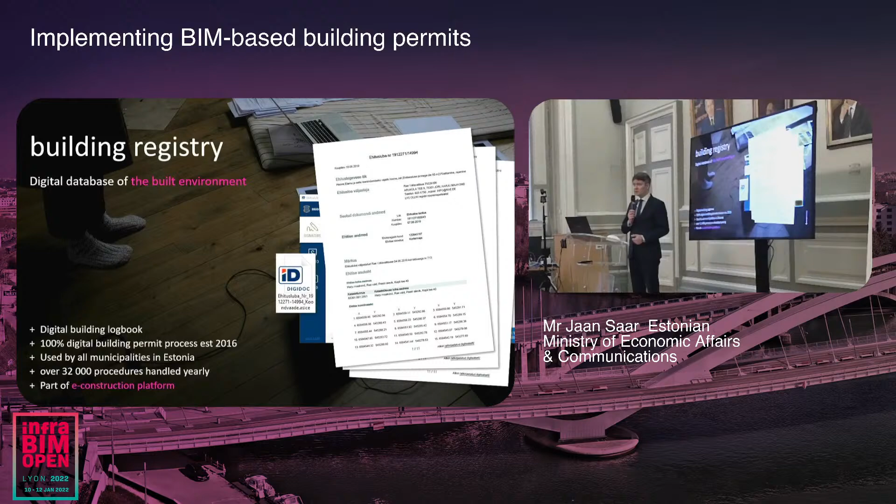So once everything is uploaded to the system, it is reviewed by the local authorities, by different agencies, anybody that is related to the building process, and when everybody signs off, you get a building permit like that. The system we have, the building registry service, is used by all municipalities in Estonia, so it is central. Mostly for buildings, also for infrastructure, but some constructions for roads are also handled by the transport administration. But we are working to bring them all together on one platform.

And the building registry services are also part of the e-construction platform, which is kind of an umbrella system that we have developed to collect all services and data related to the built environment into one place. So it's just one click away, and you don't have to search in different systems. Okay, so that's a bit of a background.

But what we are doing now is we are moving forward from just this digital PDF drawing paper-based process into something more advanced. And before I jump into the BIM-based building permits, I wanted to talk a little bit about killer apps. I'm not sure how many of you are familiar with this term.

I hope many of you are. A killer app means a killer application. It is something that you can do on a device or a service that really brings so much value that everybody wants to use it. And it means that it's so popular that it becomes a reason, for example, for buying a computer.

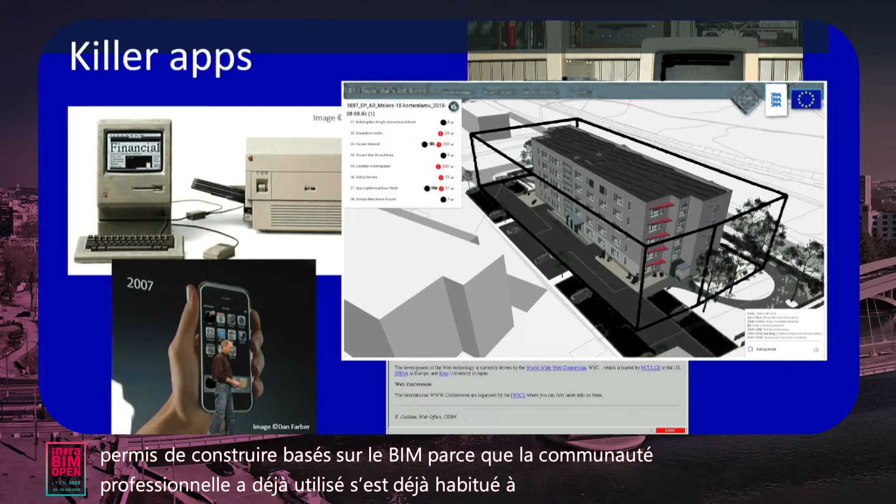And I strongly believe that the killer app for BIM is going to be BIM-based building permits. Because the professional community has already gotten used to using BIM - designers use it, engineers, construction guys. It's there, but a lot of people are still outside of this specialized field. For example, in Estonia as well, this includes local authorities, municipalities, people who review building permits. They don't usually come into close contact with BIM. And I think this is the case in most countries.

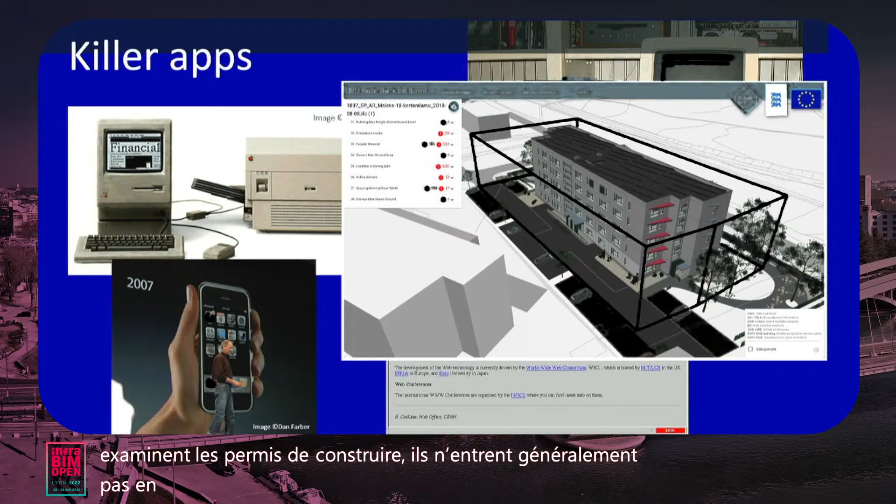But we have started developing a BIM-based building permit system. We've just finished the first phase. We will start piloting with Estonia's capital city, Tallinn, hopefully in March already, to see how it works in real life, how people in the municipality, in different offices, react to having a BIM model there.

And I have a short video here explaining how it works, how the process is done. This was developed with the help of the European funds, of course. We had a Dutch company working together with an Estonian IT company developing this.

And the process starts with the applicant. They have an application, a building permit they want to get. They have a model. Important to note here is, of course, the use of open standards, IFC model. They upload this IFC model to the building registry service, which is part of the e-construction platform, where it becomes available to do some checks on it.

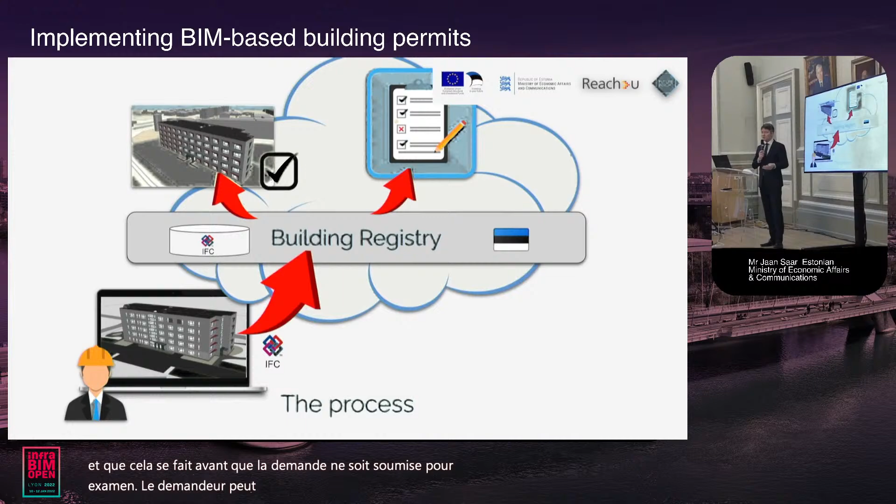And we are applying many automated checks to this model. This is done all before the application is submitted for review. The applicant can do this before they submit it. They can go over the checks, see if everything is okay, if the model is according to standards, etc.

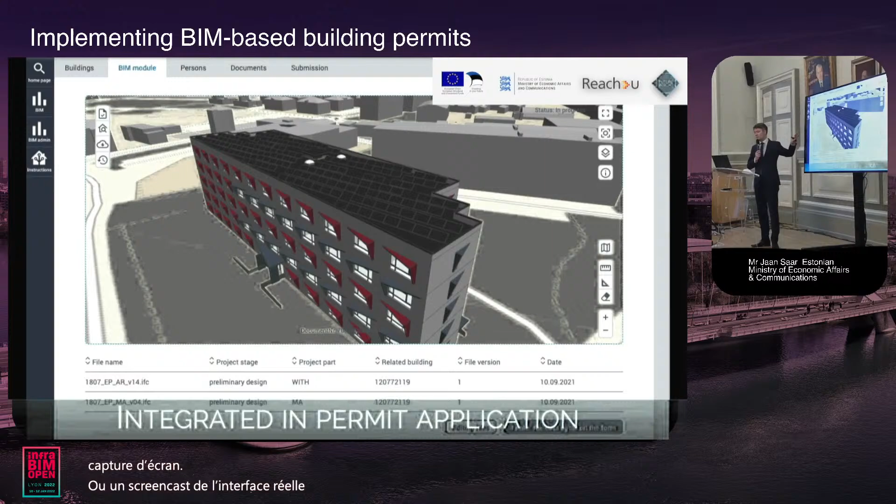And here's now a screenshot or a screencast of the actual interface. It is embedded into the e-construction platform together with the building permit services. And of course, there's a viewer for the BIM model.

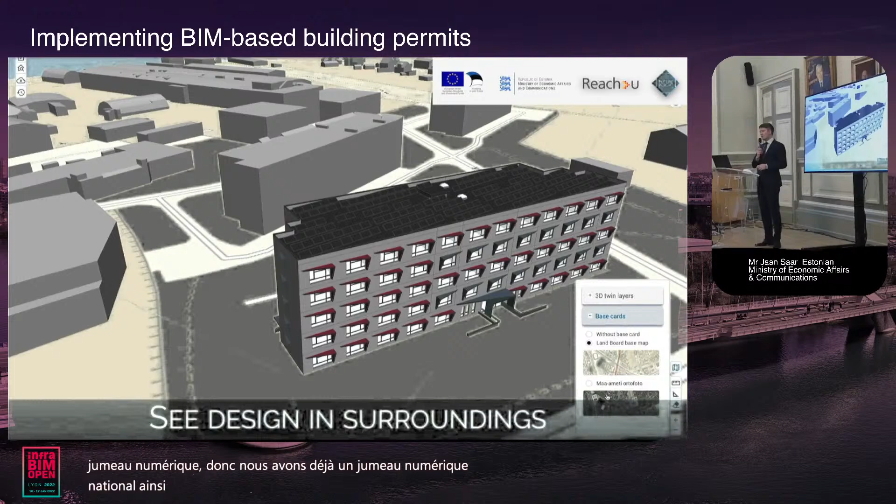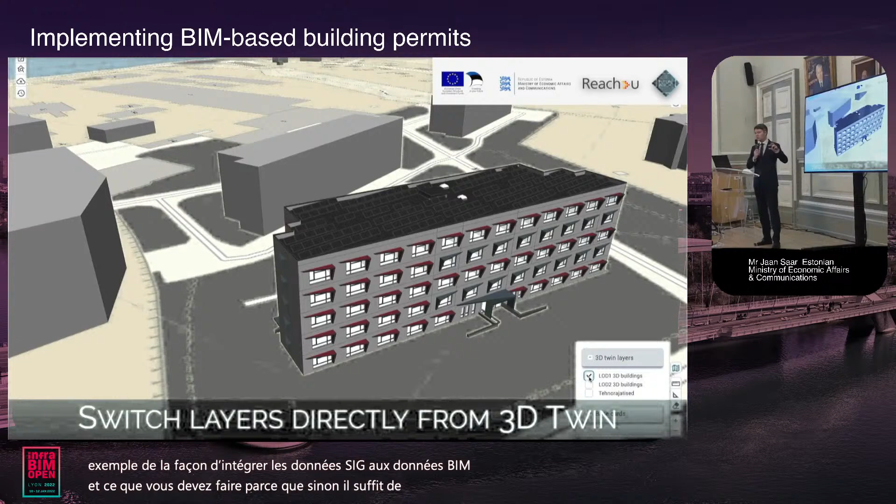And what you see around the central building is what we get from the digital twin. So we already have a national digital twin as well that we launched at the beginning of last year. And this is another really good example of how to integrate GIS data with BIM data and why you need to do that. Because otherwise, just looking at the building as a standalone without the surroundings, it doesn't make much sense. And for the municipalities, for the guys checking this, whether or not the building is suitable in that position, it's really important to have the surrounding buildings, surrounding roads, etc., all of that connected.

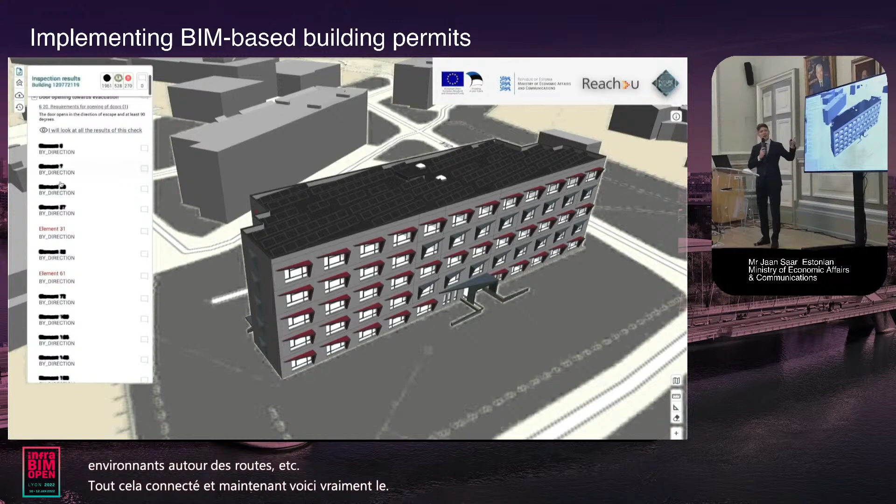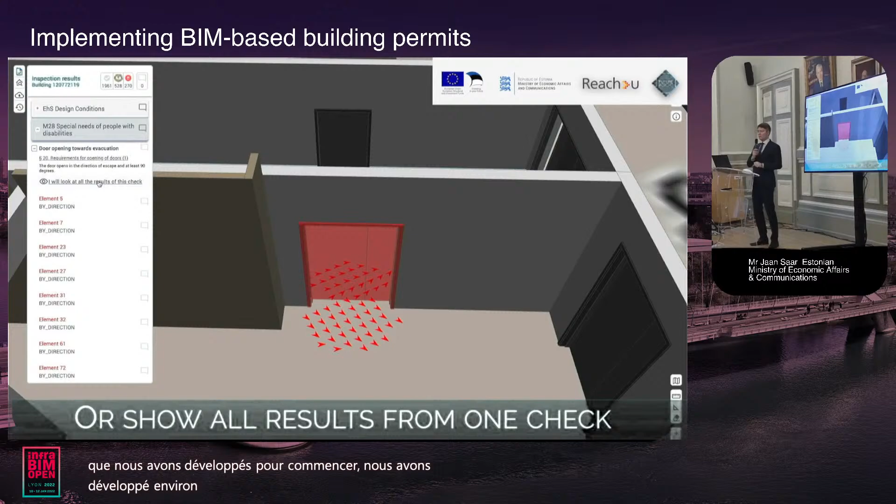And now here is really the killer app, which is the automated checks. So we've developed, for a start, about 50 or 60 different checks. But this is just a start. Because we are now going to pilot, we're going to test it very much in real life to see which kind of checks we need to really do and which are bringing the most value.

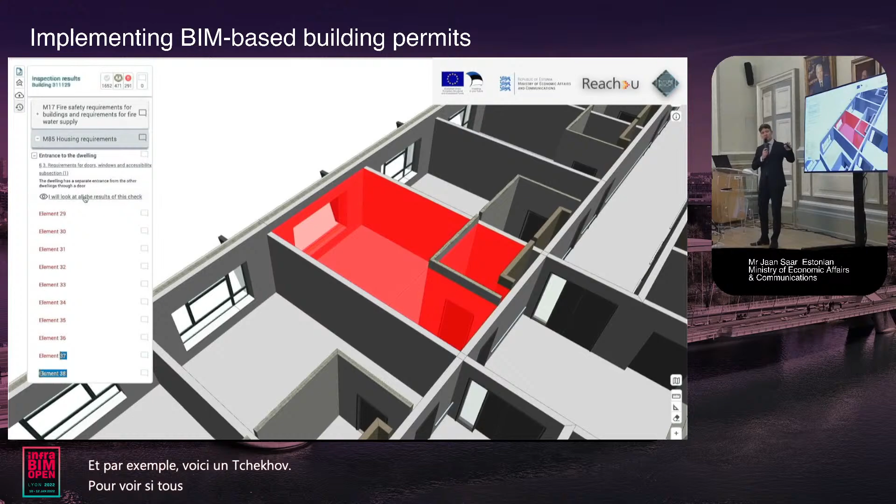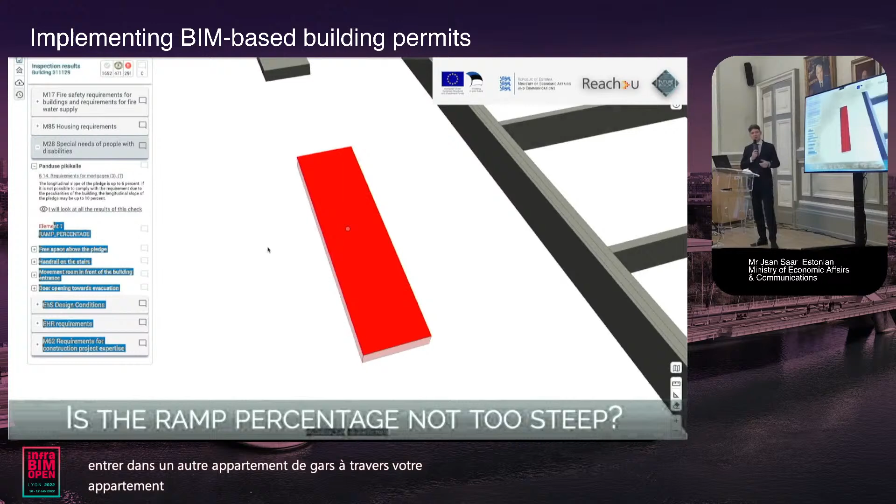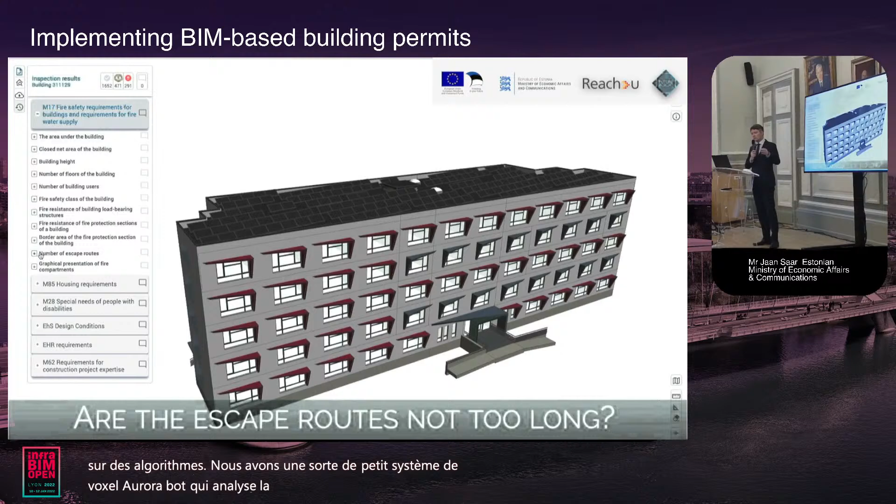For example, here is a check to see if all apartments have an entrance or exit to a public space, because you don't want to walk into another guy's apartment through your apartment. This can all be done automatically by using IFC zones and other IFC elements, but we also are applying more advanced checks here. We are also doing algorithm-based checks. We have kind of a little bot or a voxel system that analyzes geometry of the model and checks whether or not, for example, you can fall off somewhere, which you saw in the last example.

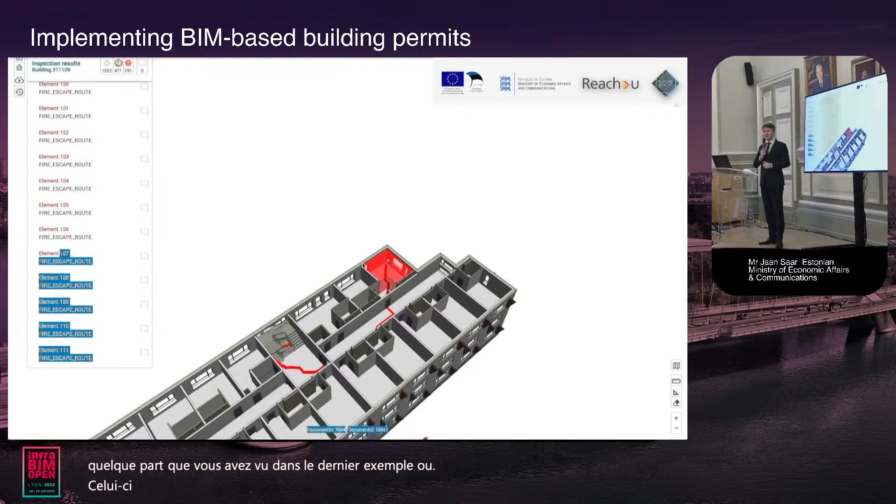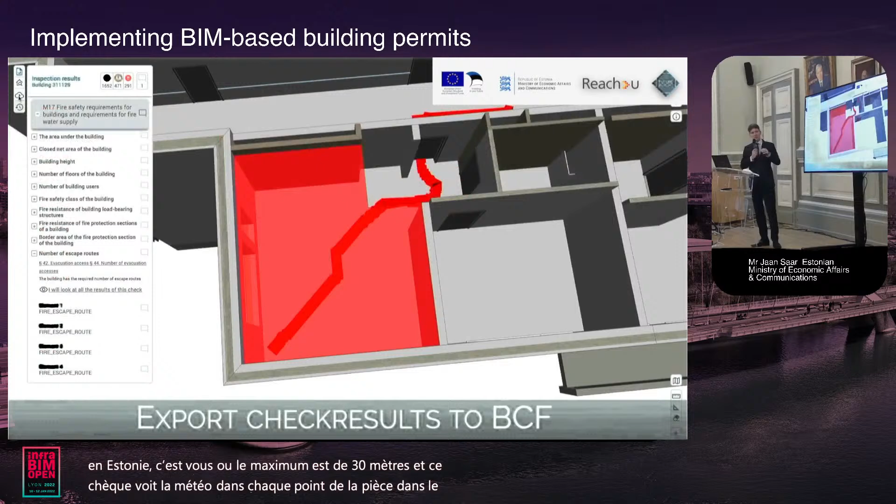Or this one, for example, the evacuation route - is it, according to standard, short enough that everybody can get out when there is a fire? The minimum, or rather the maximum in many cases in Estonia, is 30 meters. And this check is seeing whether from every point of the room in the building you can evacuate in 30 meters. It takes into account also fire doors and fire zones, etc.

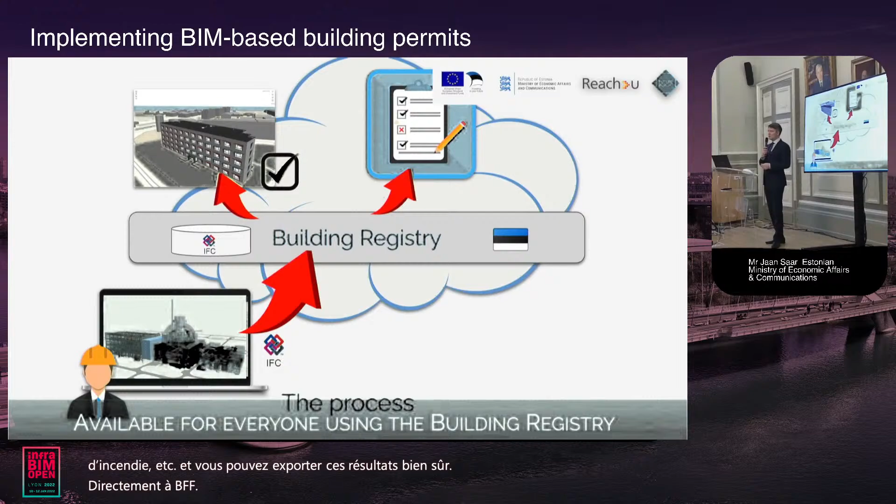And you can export these results directly to BCF, so that in the design process, everybody can already get the results into their design applications, etc., and use them like that.

So that was a quick overview of the BIM-based building permit service. But none of this would be possible if we don't use standards. That was kind of the exciting part - you get the nice visuals, the nice model, 3D stuff. That's cool, right? That's like Hollywood BIM. But that wouldn't be possible if we don't look at maybe the less sexy topic, which is standards.

But we need them for that to work. Otherwise, it's going to be so complicated and impossible to get it to scale up. And when we talk about standards, I'd like to emphasize IFC. We are using open standards. We avoid as much as possible any kind of proprietary standards or software because we are a government agency for one.

But that's not the only reason - I think open standards are really the way of the future. Another standard is CCI, Construction Classification International. I put a picture of Lego as a very well-known standard we all know from a young age, which you can use to connect bricks and make fantastic things. This is what also happens with standards.

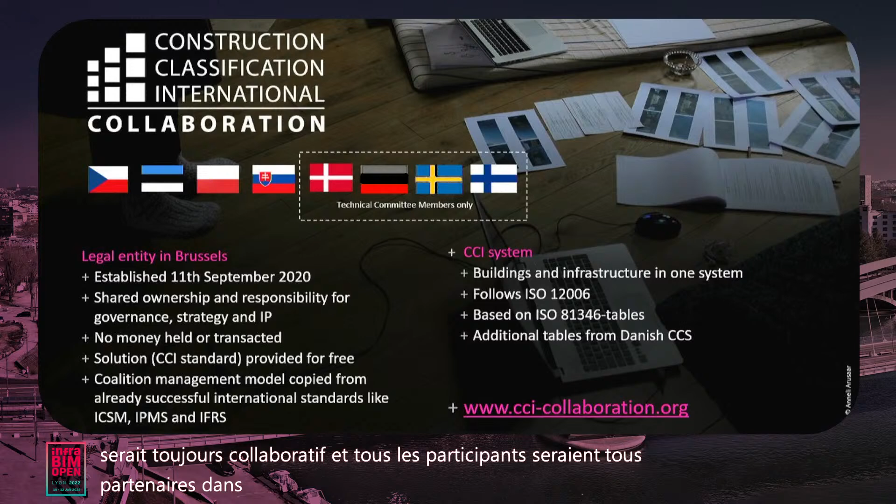Where we are now, we established a non-profit entity in Brussels to keep this classification system open, so it would always be free and collaborative, and all participants, all partners in this Construction Classification International collaboration entity are equal owners. They share responsibility, they share the IP, and we want to keep it free.

There's no money held or transacted, and everybody can go online to cci-collaboration.org, download the classification system, use it, and submit an application to join our collaboration and work together with all the countries listed here. Official members include the Czechs, Estonia, Poland, Slovakia, and of course Denmark, Germany, Sweden, and Finland - all part of the technical committee as well.

Here's a quick snapshot of how the management model looks. The international entity which manages the CCI core is at the center, so everybody is using the same core, but it's possible to extend that with national extensions. For example, in Estonia we have CCI-EE, meaning we are using CCI but we've also added, according to pre-agreed rules, extensions of the classification system that we need in Estonia, that large procurers or clients there might need.

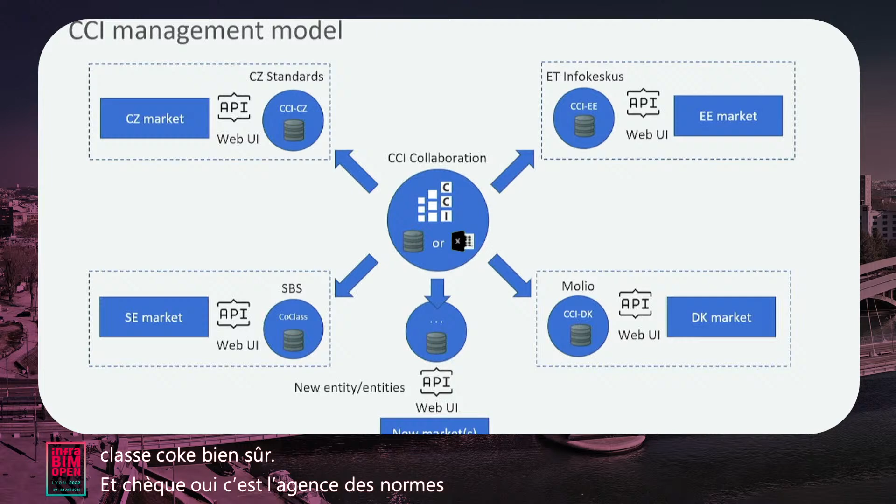This makes it very flexible - you have the core, you have the agreement on how to extend it, and you work together with everybody else. For example, in Denmark, Molio is the company responsible for managing the classification system. In Sweden, it's Swedish Building Services under the name CoClass. In Czechia, it's the Czech Standards Agency. All of them are doing this work in their countries, and of course you can always have new markets, new entities.

Before I wrap up, I'd like to say implementation is the hardest part. It's easy to develop a classification system - you get a couple of bright minds, put them in a room, they go through the data, analyze it, and come up with a system. It might be the best system in the world, but without implementation, without actually getting it to companies to pilot and use, to build their processes on that system, it will go nowhere.

That's where our effort is now going - implementation of CCI. We're doing it on the government side, starting pilot projects with the largest public clients in Estonia, for example the road administration, the port of Tallinn, the city of Tallinn, etc. So this is really important, to work together.

This brings me to my last slide, which is all about collaboration. We need to work together, both the private and public sector, especially on these kinds of new technologies where standards play an important role. It's tough, I admit it. It's not easy because it's so much easier to look at things only from your point of view.

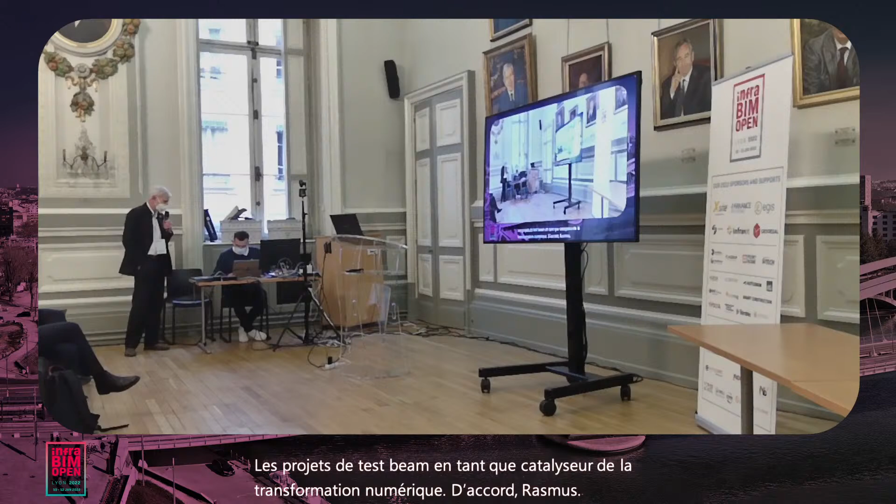Yeah, you can see and hear us here, and the presentation as well. It's okay online, yes, we got it. It's coming. So now we have your presentation online on the screen. So if you are able to start, it would be great. Yeah, thank you very much.

Yes, thank you. I'm Rasmus Fuglsang from the Danish Road Directorate, and here today I have—how do you do—Joachim Loggert from Bane Denmark, which is the national Danish rail agency. We are here today to present this BIM test project as an enabler for digital transformation. We represent the two big client organizations that have a collaboration about this, and the thoughts we have been working with we want to present here today.

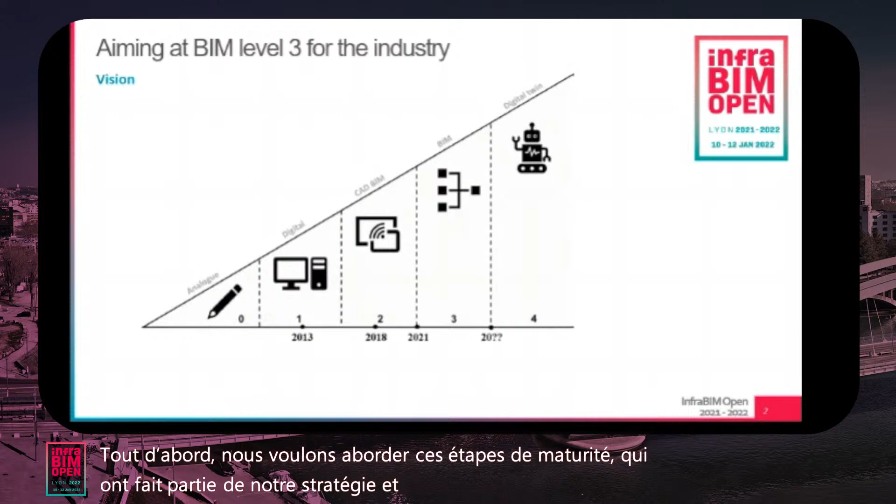First of all, we want to address these BIM maturity steps, which have been part of our strategy, and the way we see it going from analog to being super digital. In the beginning, we started with an industry dialogue to see how we could proceed the best way and how we could work together. It was an informal development, but it led us into the establishment of this BIM Infra that we represent here today, where the Danish Road Directorate and Bane Denmark together formed a strategy for how to work with CAD BIM, as we call it here. But right now we have created this BIM foundation that we're working upon, and we are facing stepping into what we call real BIM, object-oriented BIM with open formats and so on.

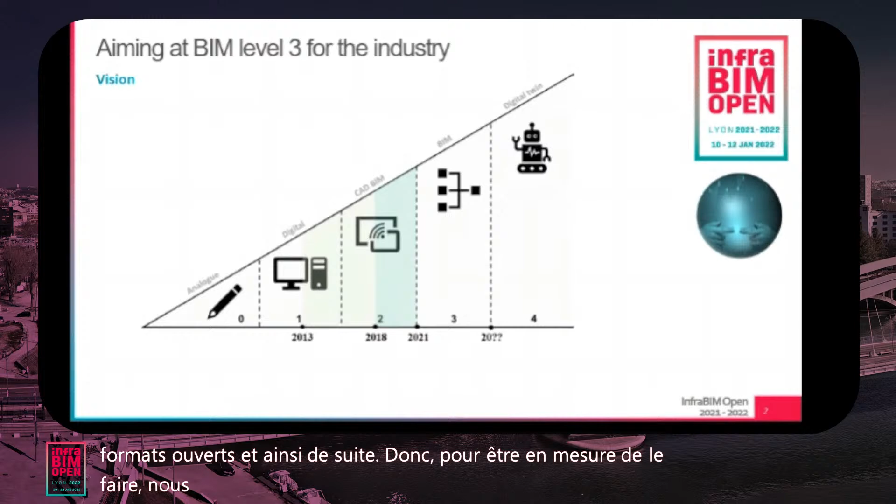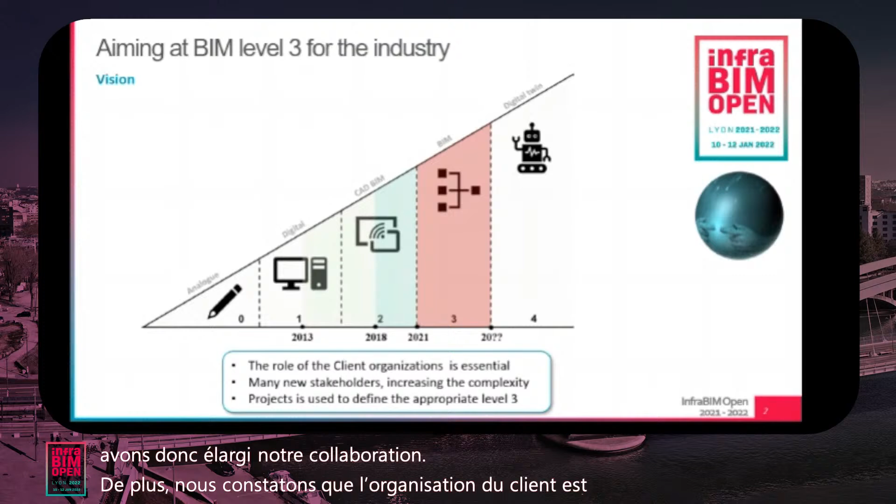So to be able to do that, we have looked at the industry, and we can see that there are several big client organizations, so we have expanded our collaboration as well. We see that the client organization is essential for making this work. We have many new stakeholders when we go into this BIM level 3 discussion, and we can see that it's quite difficult for us. That's also why there are question marks here when we reach the full implementation of BIM level 3, because it's quite difficult to define. So we want to use test projects to help us define the level and do tests based on this.

First of all, as we mentioned, the Danish Road Directorate and Bane Denmark have the roads—national roads and national railways—but there are several big client organizations here in Denmark as well which also have a big interest in this BIM topic. By joining forces and working together, this is much easier for us. So we have gotten company from the Municipality of Copenhagen as well, which has roads. We have the Copenhagen Metro, which has the underground metro systems as well. And we have Sund & Bælt, which has a couple of big bridges and a tunnel, among them the Fehmarn Link tunnel to Germany as well. So by joining forces, we are trying to create a unified approach to this BIM topic and to discuss among each other.

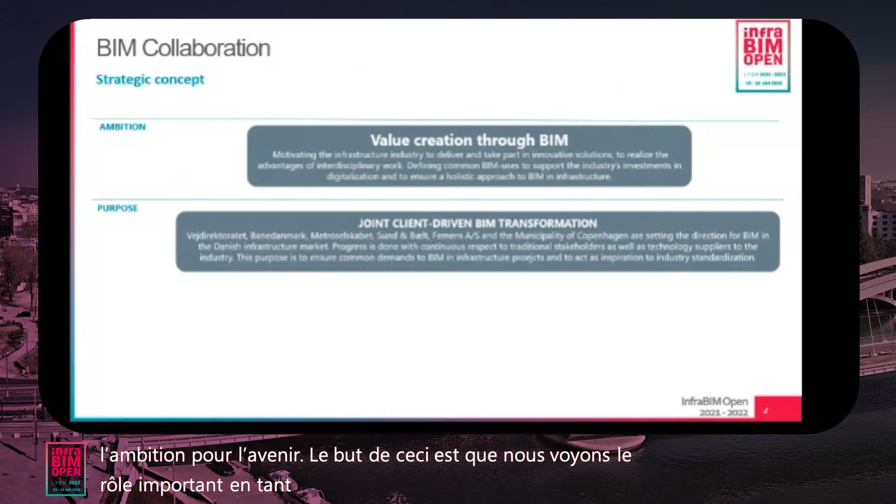What we have done is set a strategic concept for our collaboration. We can see that BIM is a good way to work with these things—there are a lot of benefits in that, so we want to use BIM. That's the ambition going forward. The purpose of this is that we see an important role for us as clients to set an agenda and to implement it in our projects. So we want to use this client-driven BIM transformation, and that goes back to the BIM maturity again.

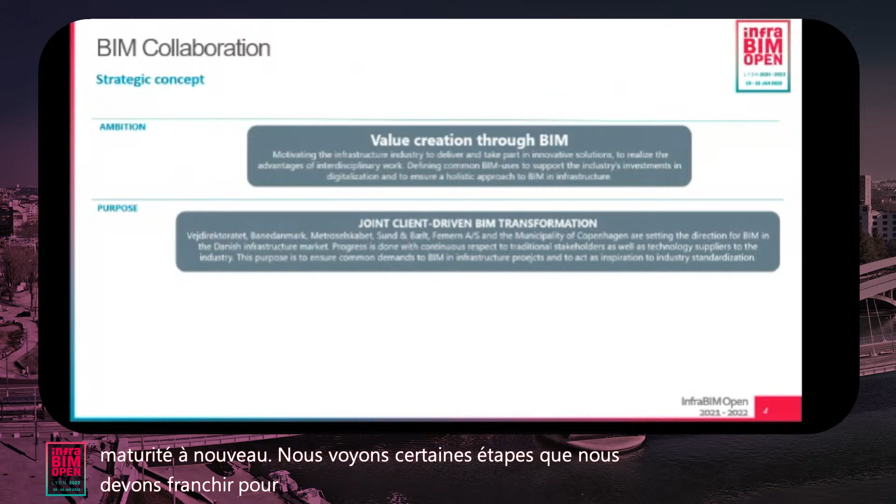We see some steps we have to go through to become better at this and to have a full implementation. So we want to use our role as client to reflect that and to inspire the industry, both to develop with us and into industry standardization. So the objectives in this strategy are four objectives, going from one side to the other, but of course with a set of loops. First we in the group have to discuss the strategic direction. We have to use the test projects to develop the BIM concepts and move on. Then we will want to qualify the results with the industry, making sure everybody can follow them, and then go into a joint implementation. And Joachim, you will go through some of the objectives.

Thank you, Rasmus. Yes, so how do we actually work with synthesizing and planning our developmental work in the industry through BIM collaboration? Well, it starts with this objective one, which is on the basis of our ambition and purpose in the context of public agency in the infrastructure client role.

Our task is to set the strategic direction for our Danish infrastructure industry with regard to BIM, with broad representation through the group of agencies and professional associations, what we call stakeholders from the market, who oversee the strategic coordination, support dialogue with other sectors, seek international inspiration, and coordinate with our Nordic friends in the Nordic markets.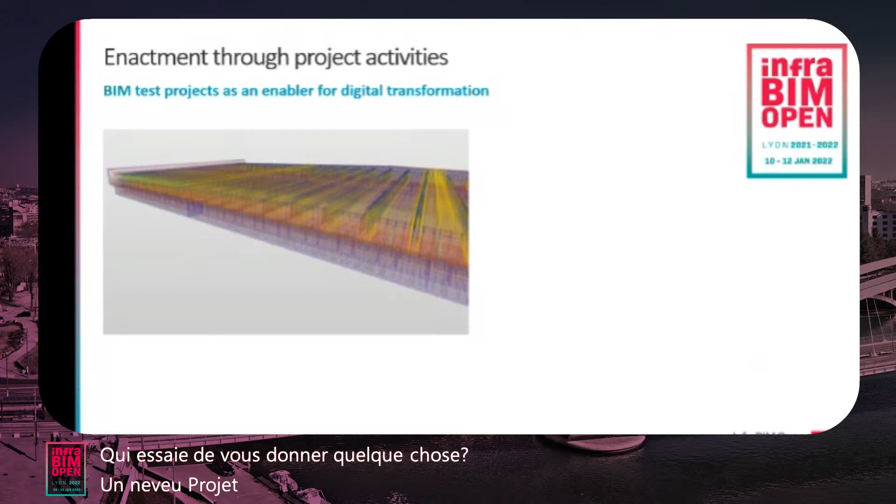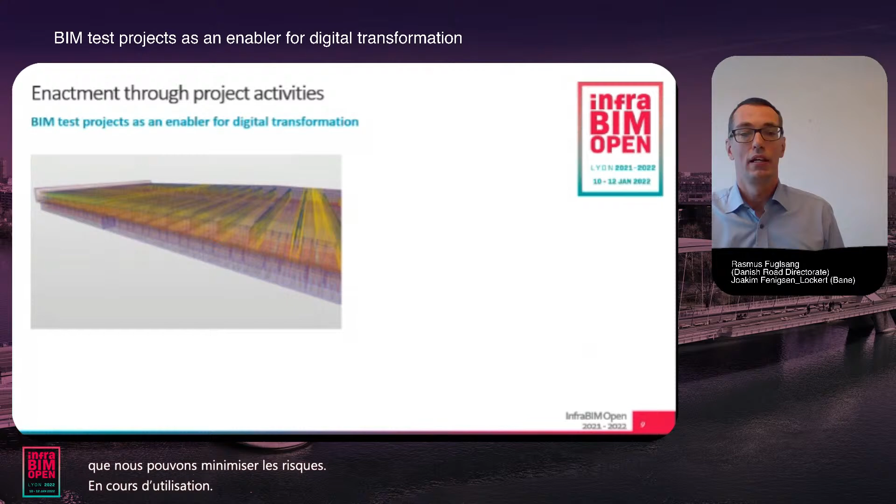Thank you, Joakim. Just to give you some examples, we have already done a few test projects following this scope. The first one here is a detailed bridge design in an earlier phase, to see if we can minimize risk and how that can be used further on, addressing the industry with new plans for that. We have reality modeling and also artificial intelligence to put into these models to do inspections as well. We have had a detailed design.

Rasmus, maybe disconnect your camera because the connection is very poor and we are losing your voice. I think we have an echo from the site, from Lyon. If you can turn off your mics during the presentation, we have an echo. I have disconnected the camera now, I think. It's much better now. Thank you very much, very good, no problem.

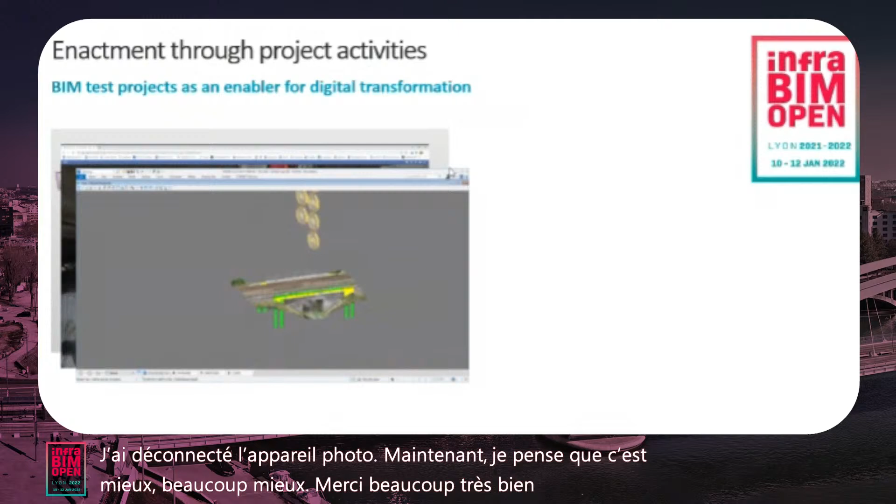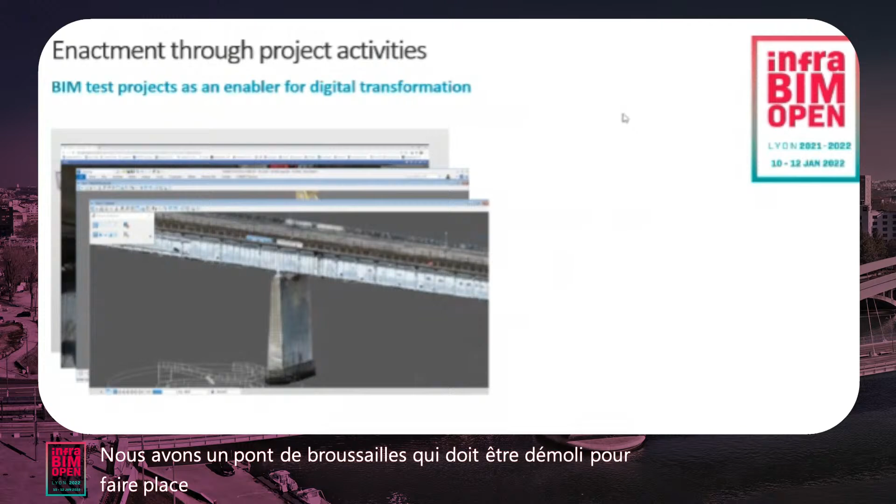Back to the test examples here. Reality modeling again combined with the design models to see what benefits this gives, even on smaller projects as this one. We have a bridge that has to be demolished to make room for a new one, and again we have done the reality modeling here, giving an overview for the participant, having this model available for the tender period as well, combining drawings and so on.

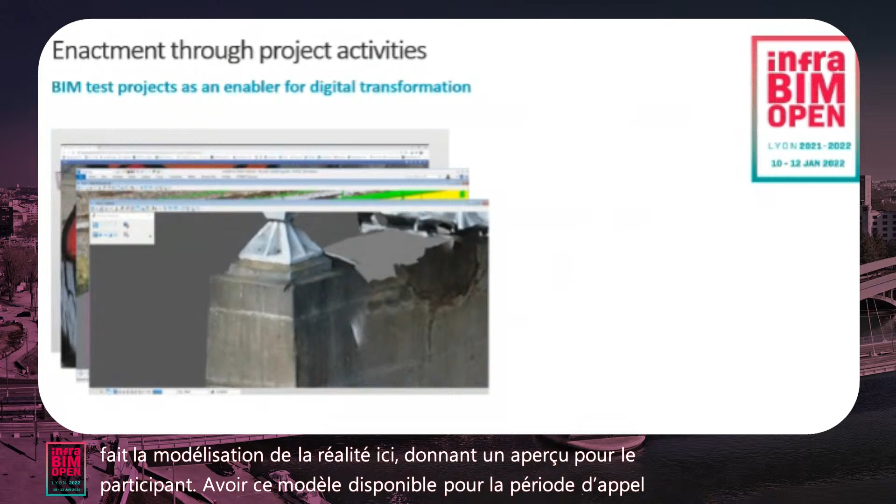Finally, here we have a project using 4D and 5D, and my colleague Søren will give you an introduction to that in a moment. This is also to show you that we want to use these BIM test projects, as mentioned in the beginning, to see how we define BIM level 3. It's very difficult to do that in advance, five years out on a timeline, so we want to use the projects for ongoing development and build upon the good practice we have here, creating enactment through these project activities, and then bring that good practice from this digital transformation into the BIM preconditions for further projects, using the test projects as an enabler for the digital transformation.

So that was a short overview from Joakim and I. Thank you for listening, and maybe there will be time for a discussion later at the roundtable discussion.

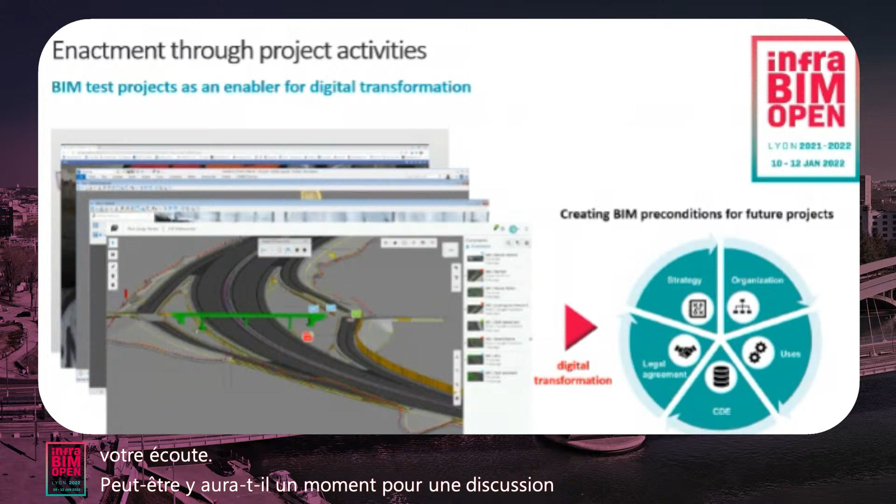Yes, it's a good idea. Thank you very much, I am speaking very frankly that I was thinking your presentation has real added value. My idea, and I will suggest this to Jan, is maybe to have some kind of presentation like that to the European BIM Task Group. I think the added value, if you compare the presentation of Jan and this one, you are going to rediscuss that this afternoon.

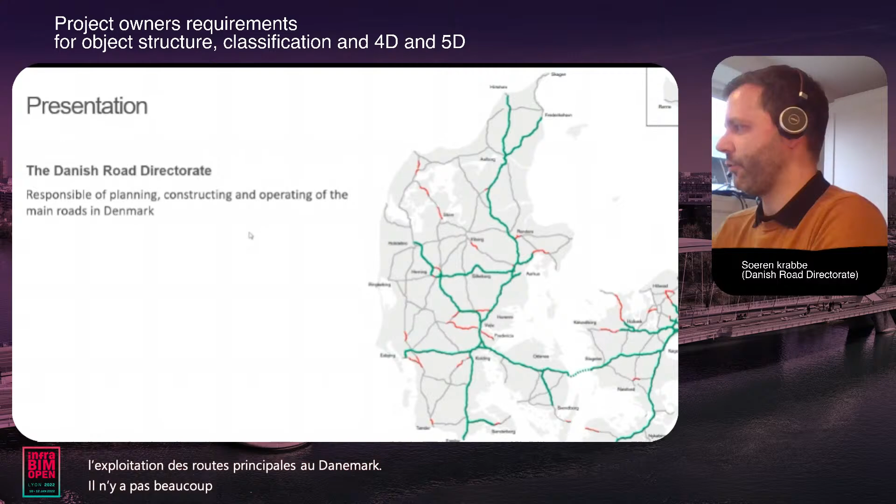All right, thank you for letting me speak here on the InfraBIM Open in Lyon. I'm sorry I couldn't be there because of Corona. My name is Søren Krabbe, and I come from Denmark. I work for the Danish Road Directorate. The Danish Road Directorate is responsible for planning, constructing, and operating the main roads in Denmark. It's not a lot of roads in a small country, but it's the main traffic that we operate on these roads that you can see here on the map.

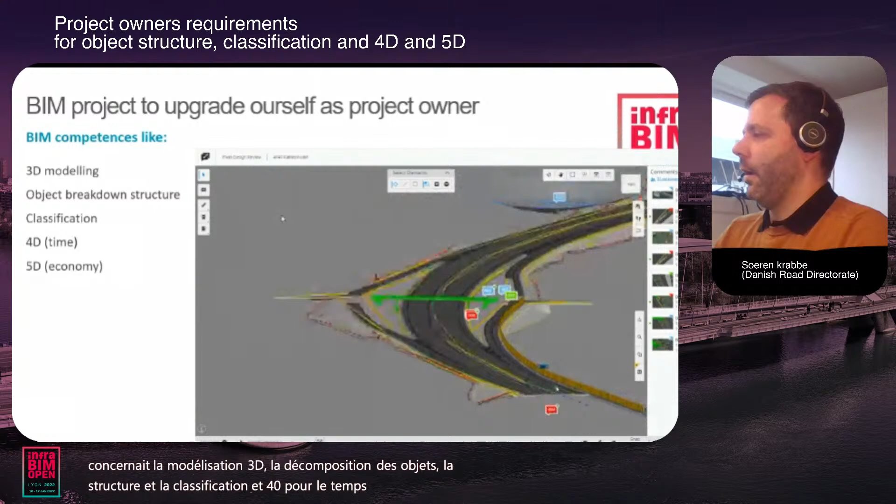Just to continue from Joachim and Rasmus' presentation, I will try to go on telling you about a large-scale BIM project we have been working on to educate ourselves in handling BIM as a project owner. The project was about 3D modeling, object breakdown structure, and classification, and 4D for time, and 5D for economy. For us as a project owner, not all of us are specialists in designing and have a lot of knowledge about BIM. Just when you start operating your BIM as a project owner, you have to get some knowledge about, for example, the road starts when you go from 2D to 3D.

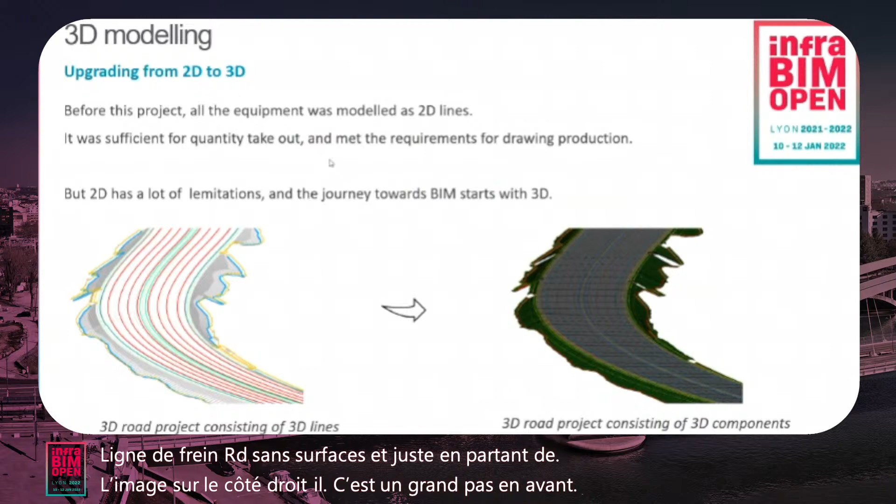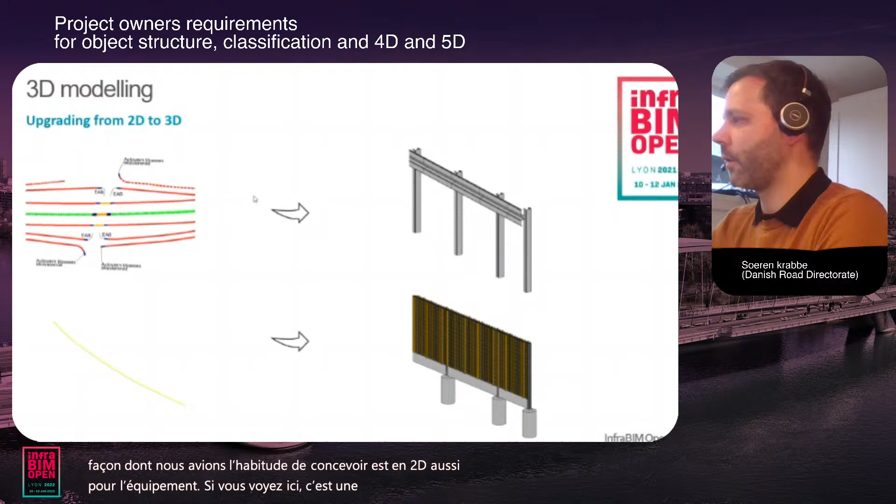So if you see here on the picture, it's a designed break line road with no surfaces, just going from the picture on the right side. It's a big step up from that BIM ladder Rasmus and Joachim also talked about. The way we used to design is in 2D, also for equipment. As you see here, it's a typical safety barrier or guardrail project, and at the bottom left there's just a 2D line that could traditionally be a noise barrier.

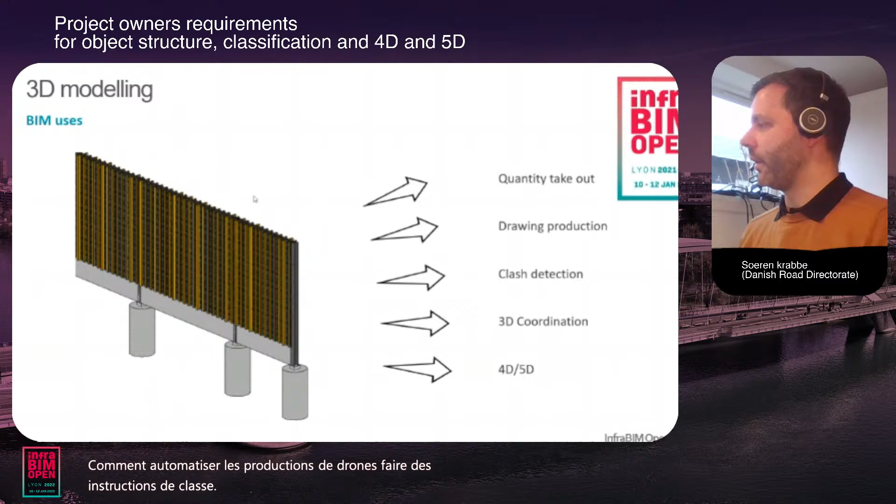Just lifting them up to 3D is a huge thing, and you can use this information for all kinds of stuff. We've developed BIM uses that we need to implement in our organization, like quantity takeouts, how to automate drawing productions, do clash detections, 3D coordinations, and 4D and 5D.

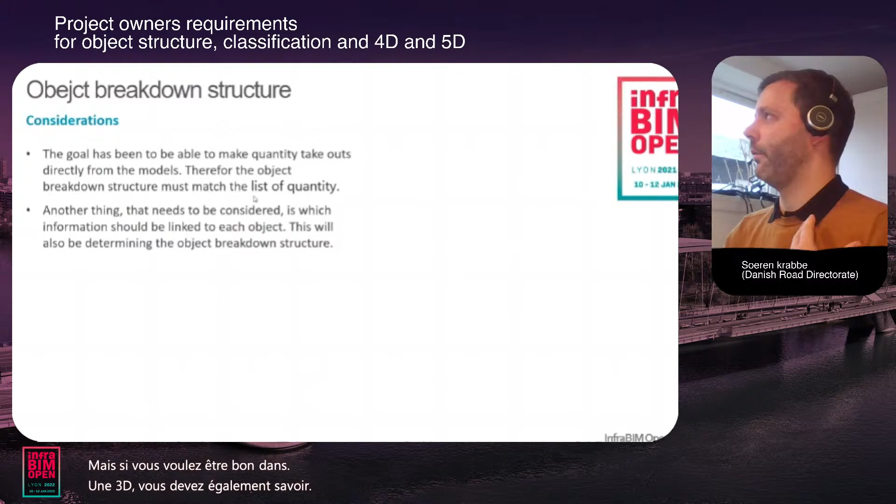But if you want to be good at 3D, you also need to know what kind of 3D you want to order from your consultants. For example, here we have a lamppost, but this lamppost is also defined with a list of quantities, and you need to know how to break this element up into different pieces in your object breakdown structure, to get the right quantities out of the object.

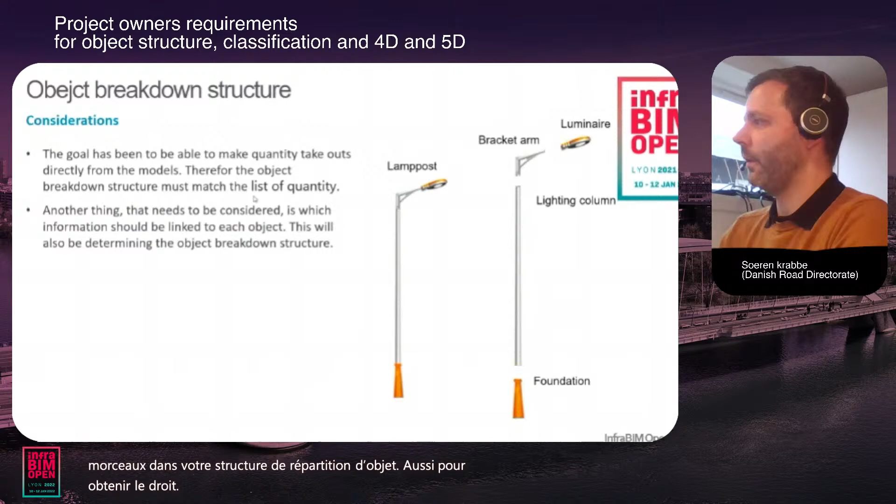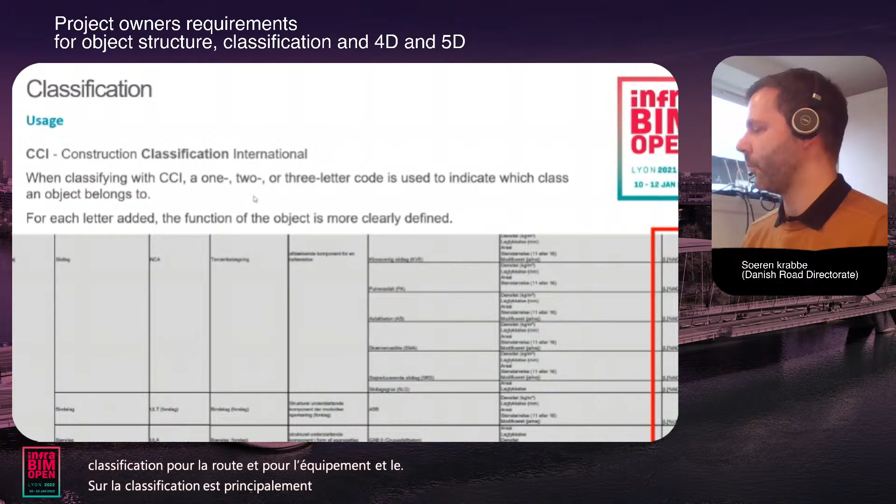We have also worked a lot with classification, using a Danish developed classification called Construction Classification International. It's also known in other countries, in the Nordic region and other countries in Europe, Estonia for example. What we have tried to develop is a classification for the road and for the equipment, and the classification is mostly 3 letters with some numbers, and it has a code, as you can see here on the right.

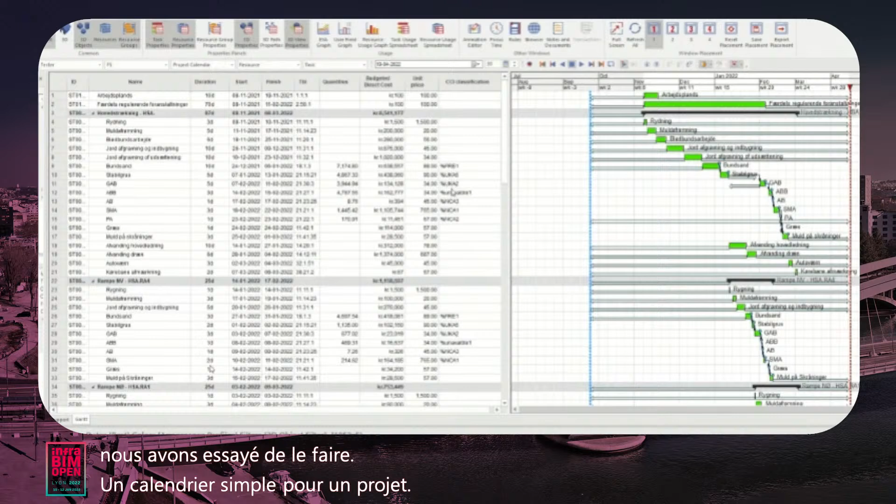We have also worked a lot on how we can use 3D models with classification, bonding that together. Here we have a BIM system, and we have tried to make a simple timetable for a project. When we have all of our information in our 3D model with quantity, we have a classification system, and we have the prices, we can link all of this together.

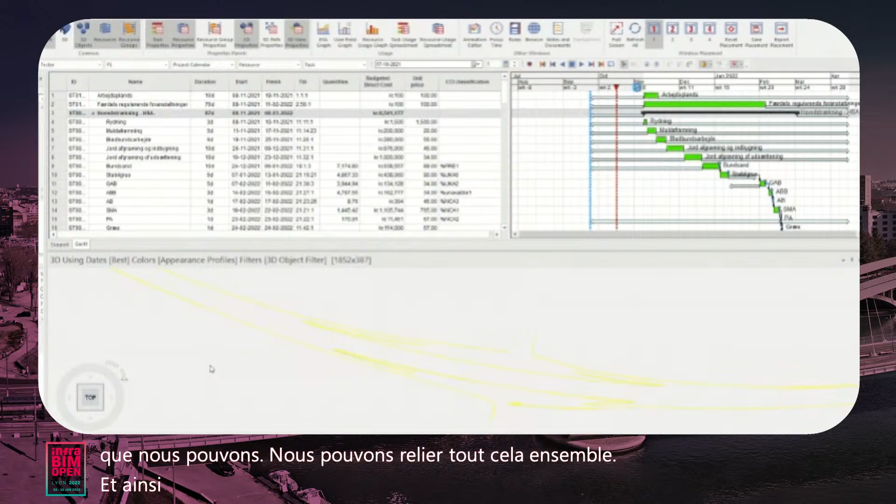So here we've tried to make an example with a 3D model, and you see I'm running the 4D model here. If you have the unit prices, you can just multiply them with the quantities in the model, and all the quantities that have been hooked up to the task in the timetable. So now we have a 4D model that has been played here, and a 5D model for our budgeted cost. All of this is the foundation for the Danish Road Directorate.

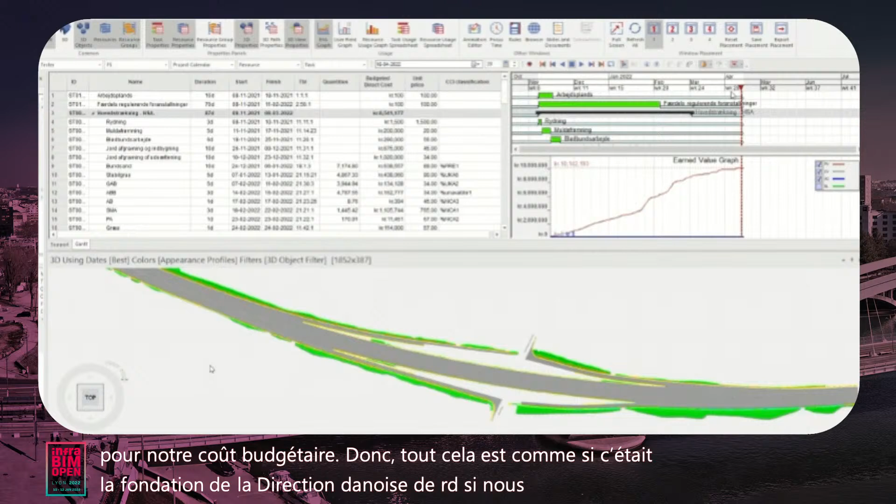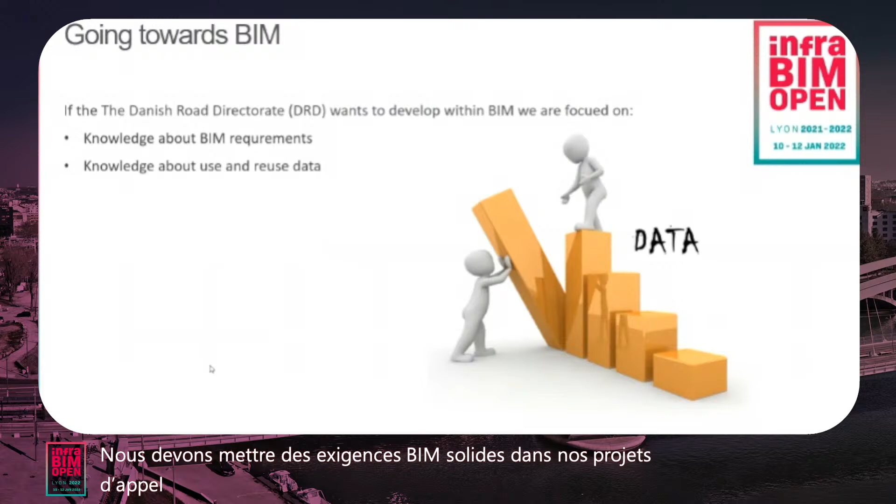If we can do this, and we know how BIM works, how we can put data together, we believe that we can go much stronger in the collaboration with our consultants and our contractors. But we have to focus on that. We have to put solid BIM requirements in our tender projects, and we as a project owner need to know how to use data and how to reuse data. We need to know what kind of operation and maintenance data we need, and we also need to know about all the different kinds of formats and what potential they have, especially IFC.

That will actually be the next step for us. We can see there's a very, very big potential in IFC, like sharing data and taking out quantities and so on. And of course, as an organization, we would like to be more independent of a consultant telling us what to do. We would like to know what kind of demands we have to put in our tenders when it comes to BIM. Actually, that was all I wanted to say, Christoph.

Hello? Yes? Yes, that was actually all from me. So thank you very much.

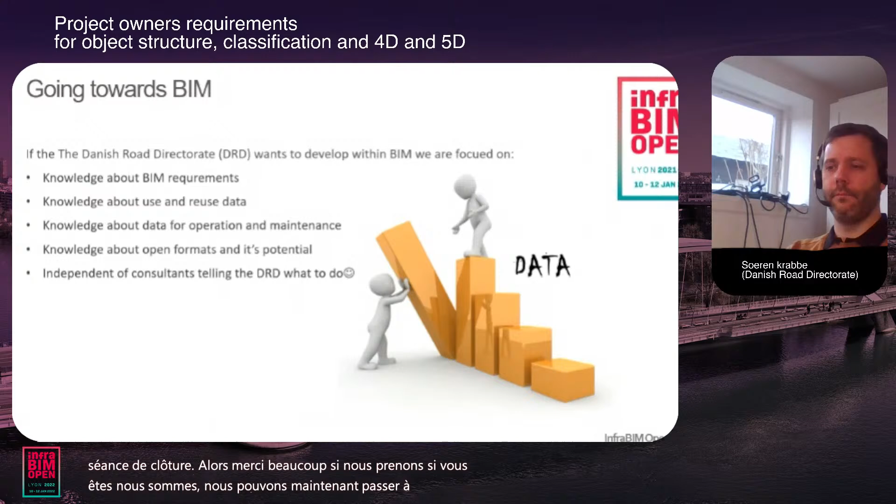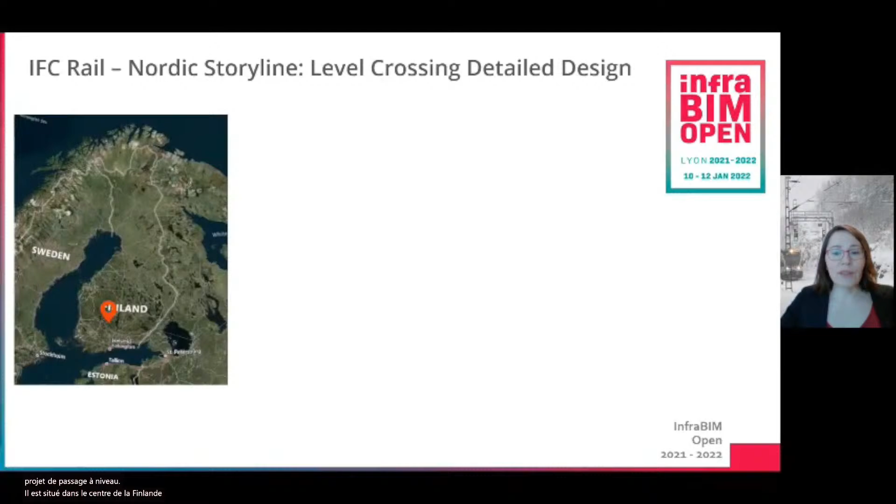For our IFC Rail storyline, we chose the Toivola level crossing project. It is located in central Finland, and until 2020, when it was improved, it was one of the most dangerous ones in Finland because of the quite unfavorable crossing angle of the road, as you can see here in the original road.

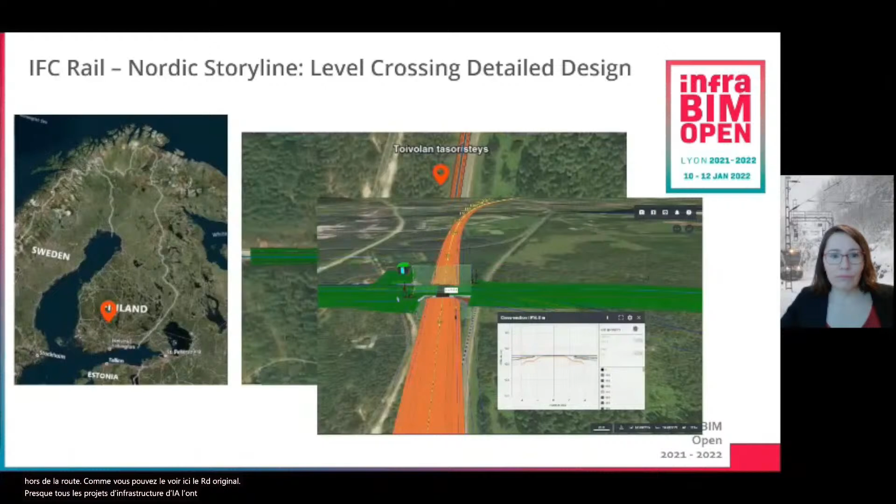Like nearly all of the FTIA infrastructure projects, also this one was designed and built with OpenBIM. The dataset and documentation came from FTIA, and the dataset includes, for example, geometries in Inframodel 4, which is the Finnish extension to LandXML. Then we had surface models, signaling objects, and cabins, boom barriers, axle counters, signals, cabling, and also snowplow protection, and so on.

Also, data that was included in this project but not included actually in this storyline work were also drainage and road data.

So our findings regarding the dataset: we quite clearly see that the dataset must be really well compiled and comprehensively documented. This is very important so that the software vendors, when they begin their work, can have a very easy start to the project and know what they are dealing with.

We had as the starting point a real-life project according to the FTIA InfraBIM guidelines. So we had the data structure, meaning folders and files, we had the defined exchange formats, and we had the documentation.

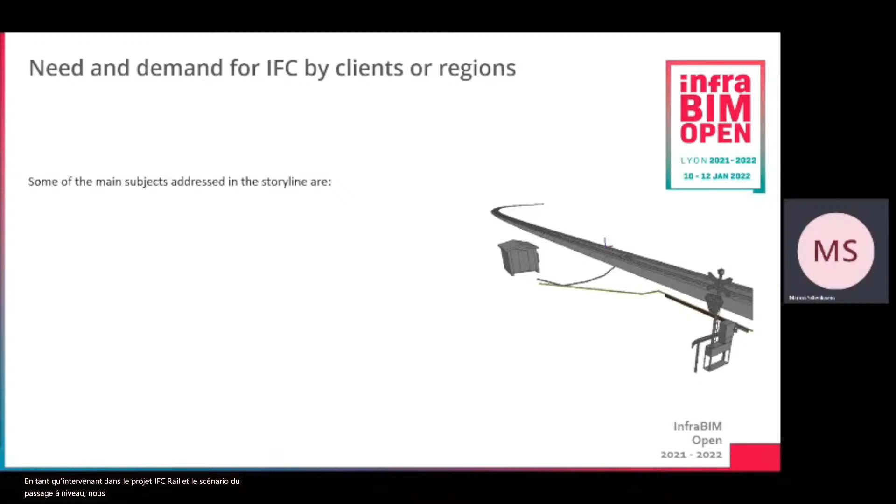Thank you, Marion, for the great introduction of the Nordic storyline. Let's continue this presentation. As a stakeholder in the IFC Rail project and the level crossing storyline, we see this work as one of the cornerstones of a standardized and machine-readable information exchange process.

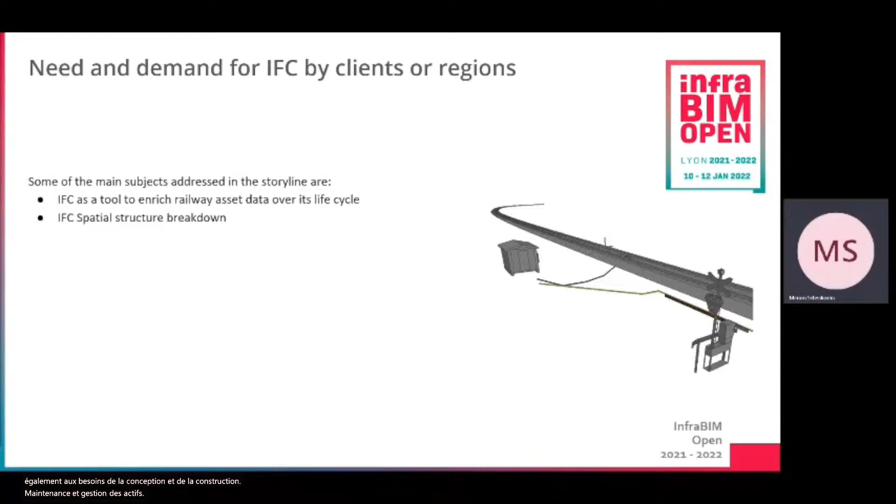Some of the main subjects addressed in these works are: IFC as a tool to enrich railway asset data over its life cycle to equally serve the needs of design, construction, maintenance, and asset management. IFC spatial structure breakdown to describe the complex entities of different domains of level crossing. IFC as an enabler for machine-readable requirement management. IFC as a prerequisite for M2M management of asset information. IFC as an enabler to increase international competition when we can require information in a standardized form. And last not least, reduced cost for asset information management in a life cycle perspective.

This storyline actually combines both rail and road, which is important for us as stakeholders with responsibility for both road and rail infrastructure. The result has proven that IFC 4.3 will be able to model, store, and exchange the necessary information needed for the design, build, and maintain phase for the physical or built aspect of the infrastructure assets. One of the fundamental parts for rail design is the alignment, which also have been used in this storyline and proved to work.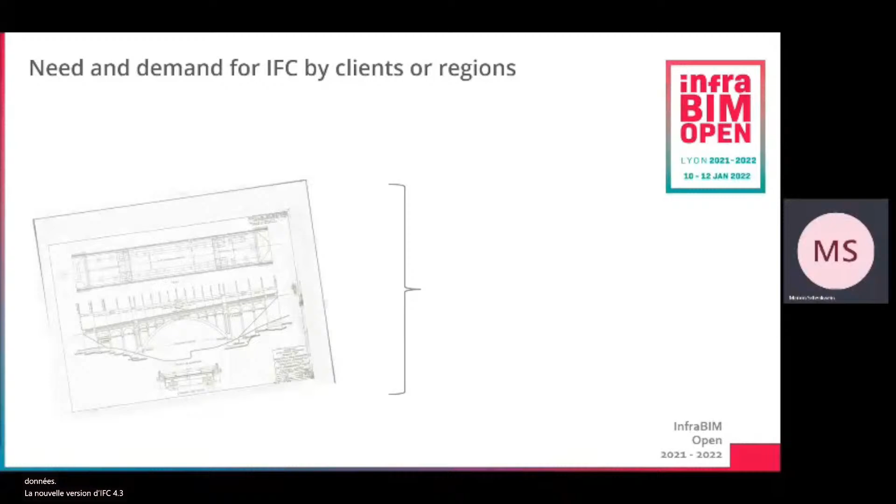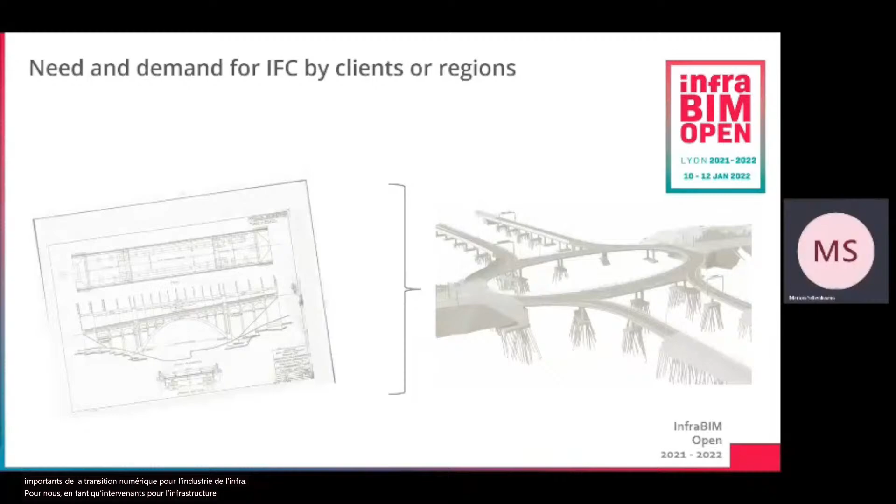This is important for our internal acceptance of a new method of data delivery. The new release of IFC 4.3 will be one of the most important enablers in the digital transition for the infra industry. For us as stakeholders for national infrastructure, this transition will not be possible unless we have standards in place. With several thousands of projects ranging from smaller modifications to large mega projects, we need to rely on standards both for our data deliveries and verifications, but also for requirement management.

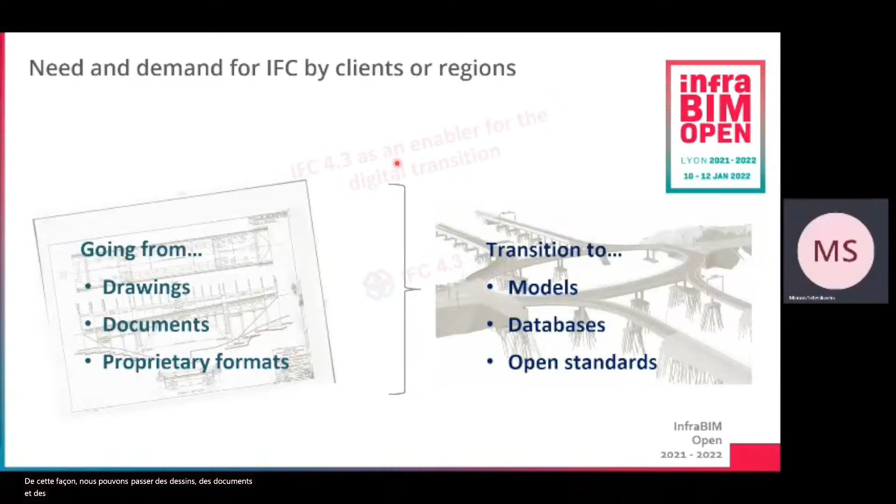So that way we can go from drawings, documents, and proprietary formats to models, databases, and open standards. And this, of course, thanks to IFC 4.3.

So let's go to challenges and obstacles. The startup time was longer than expected. Much of the work was done during the last period of the projects. The data sets were critical and complicated to compile. Without data sets, the software companies are difficult to involve. It was kind of hard to involve the big software companies. We found it easier, or that most of the work were done by the smaller companies.

It was also quite difficult limiting the scope. It was hard to find the scope so it wouldn't be too small, but at the same time that it wouldn't be too big. Several storylines in parallel were going on and with the same participating companies.

And let's proceed to the learnings and insights. The participating software companies found that working with storylines gave good support for their internal implementation of IFC 4.3. More insights in IFC and continued work for stakeholders to feel assured that we can use IFC in our information management process are actually following.

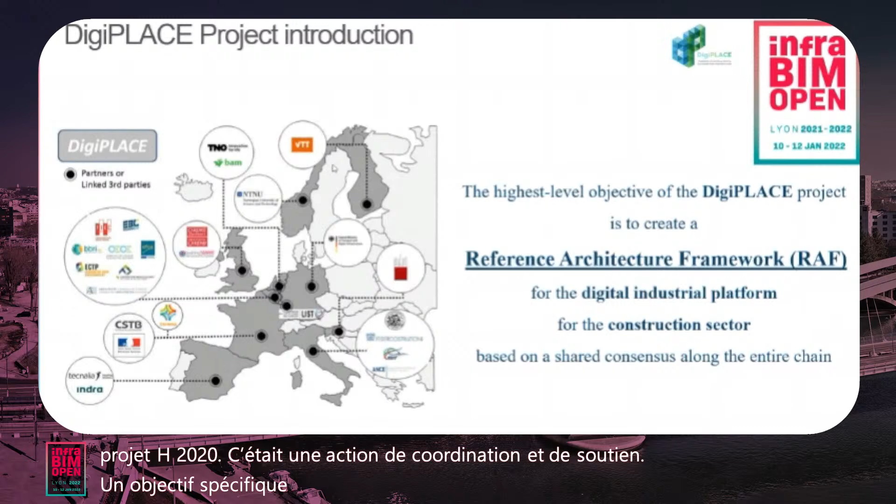So what I was saying is that DigiPlace was concluded last year, in May 2021, and it was an H2020 project - a coordination and support action with the specific objective of developing and identifying a reference architecture framework for the digital industrial platform for the construction sector. When we started DigiPlace, we identified the objective of defining that digital industrial platform - digital platforms for the construction sector - because this is one of the points we'll discuss regarding the development of platforms for the construction sector. One of the main results of DigiPlace was already the creation of the partnership that we used in the development of the project, which you can see here.

So the possibility to have around the table and work together with the main association in the construction sector, with research centers, with the university, with construction companies involved in the project, with one objective: to create a common ground for the development of digital platforms for the construction sector, to understand what we should do to go in the right direction and in a coordinated direction.

Another result, the second one, together with the reference architecture framework, is that in DigiPlace we developed a strategic roadmap for the implementation of the reference architecture framework, and this is one of the other results that we have.

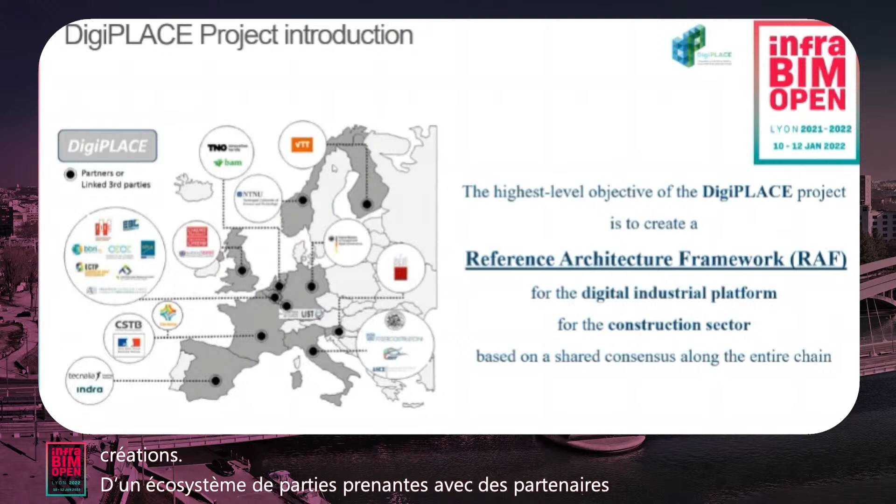So if I have to summarize the three main core results that we have in DigiPlace: the creation of an ecosystem of stakeholders together with the partners and other bodies created in the project, the creation of the reference architecture framework, and the development of the strategic roadmap for the application and implementation of the reference architecture framework.

Let's look at the structure we have, because of course these are the main results, but a lot of research was developed during the project. As you can see here, the two work packages we developed and identified as work package 3 and work package 4...

...were dedicated to identifying the level of implementation of digital technologies and practices in the construction sector, what solutions already exist, and what are the success points in these solutions, not only in the construction sector but in different sectors.

And on the other side, in work package 4, identifying what are the barriers and gaps in the construction sector, so that we can identify where the issues are and how we can solve them.

And starting from these results, we have work packages 5 and 6, which are about the development of the reference architecture framework and the development of the strategic roadmap.

And you can see we also worked a lot with a specific work package, work package 2, about the creation of this long-term community building. This involved identifying two bodies that worked together with the DigiPlace project.

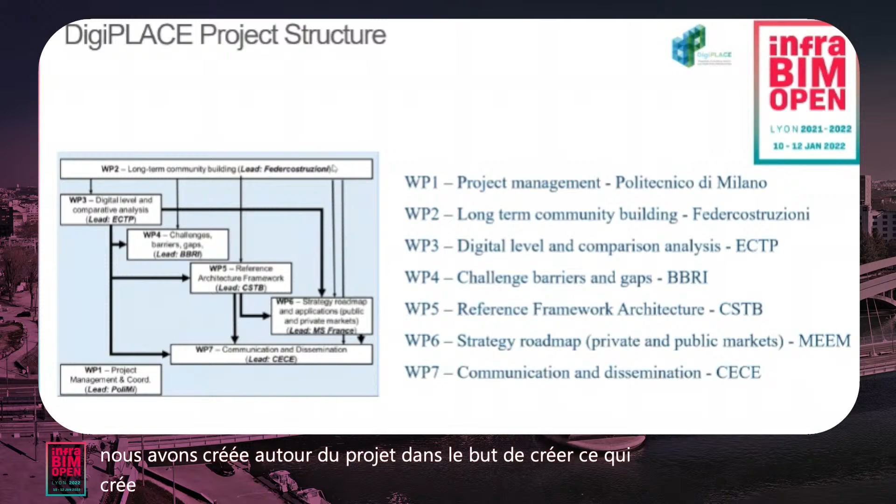One is the advisory board of the DigiPlace project, involved to check the results and help adjust them. On the other side, a stakeholder community that we created around the project with the objective of creating common consensus around the results, because the idea was to create results already accepted by the majority of stakeholders interested in the community.

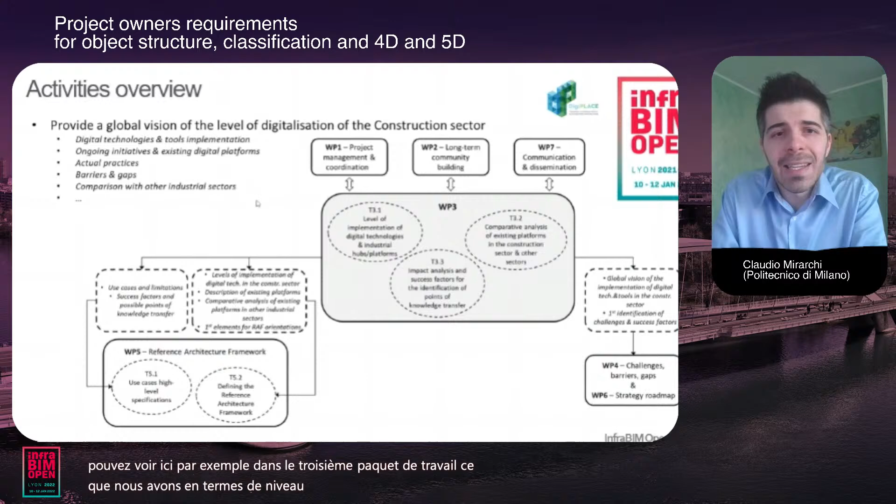So here you can see in more detail some of the main activities we developed in these work packages. For example, in work package 3, what we have in terms of level of implementation, and the comparative analysis we developed to understand what other sectors already have.

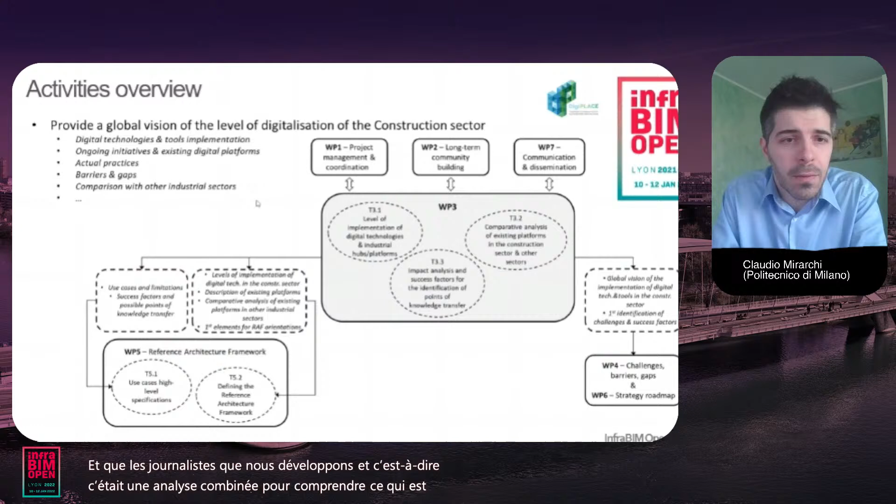...and what success factors we can bring to the construction sector to understand how we should develop these platforms, considering the constraints and specific challenges we have in the construction sector, and how these results are combined in the development of the reference architecture framework, work package 5, and the strategic roadmap.

From here, what we identified in work package 5, the development of the reference architecture framework, is that we started from 20 success factors that you can see here. In our analysis, we extracted these success factors, which were used to develop the basis for the reference architecture framework.

One specific point is that we are not talking only about BIM, not only about information models, but when we start thinking about developing digital platforms for the construction sector, we have to identify several points that should be addressed, considering for example security aspects, and how knowledge is shared at construction sector level, between different organizations, and so on and so forth.

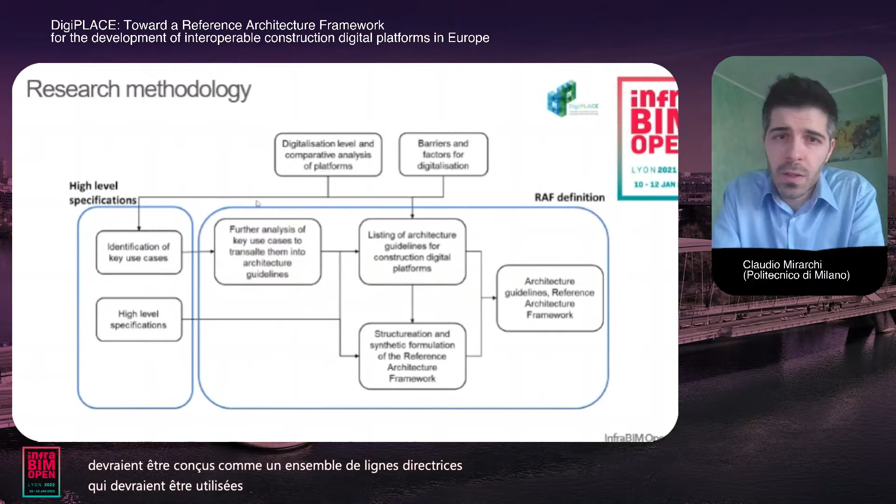We worked with two main developments. On one side, we developed a first high-level specification document, where we started identifying all the different topics and aspects, and in specific, the key use cases that the platforms should address. On the other side, the development of this reference architecture framework, intended as a set of guidelines for the future development of platforms in the construction sector. This is exactly what we developed in the project.

So what you can find in DigiPlace is a set of guidelines, a set of results that can be used to coordinate the development of future platforms.

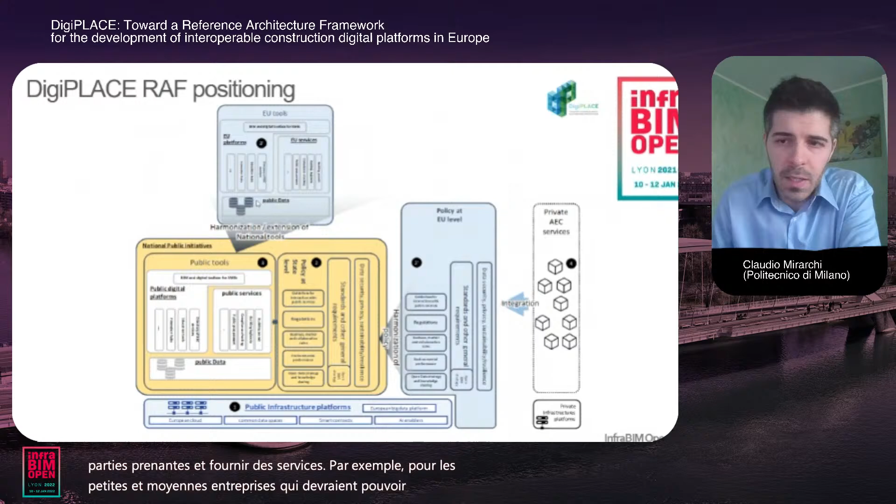Last point was an exercise we developed in DigiPlace about this idea of a perimeter for the future public platforms. You can see different areas we identified here, one being BIM and collaboration services. So we can integrate this part, but when we think about these platforms for the public sector, so public platforms...

We have to integrate the different topics, for example how we can use this platform to access public services, and how these platforms combine with existing ones in the different countries regarding other services that have already been developed digitally.

The other topic is access to knowledge, because what we integrated in the project is that the platform should be used not only for specific services, but also to promote the sharing of knowledge in the sector. So promoting accessibility to the data, the standards, shared data dictionaries, construction rules - facilitating access to data that today is often dispersed across several platforms and environments and cannot be easily accessed by interested stakeholders.